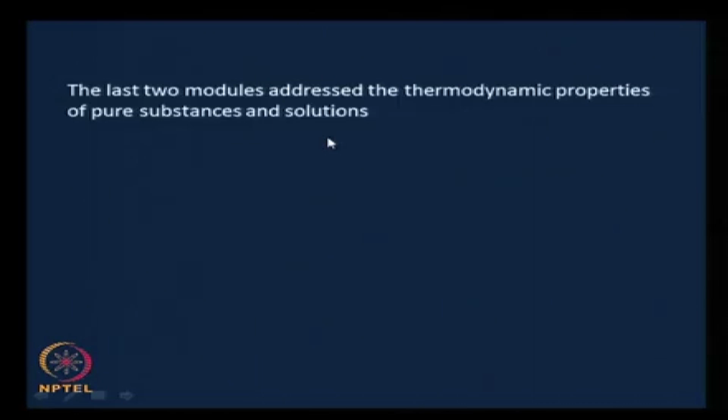The last two modules addressed the thermodynamic properties of pure substances, that was module number 3, and then module number 4 looked at solutions or mixtures, which arise when you put a minimum of 2 pure substances together. Now we have the background to address them, and it is natural to look at the next aspect, which is the equilibrium condition, and the thermodynamics associated with it.

A little while later I will tell you what equilibrium actually is, what is the nature of the equilibrium, and so on.

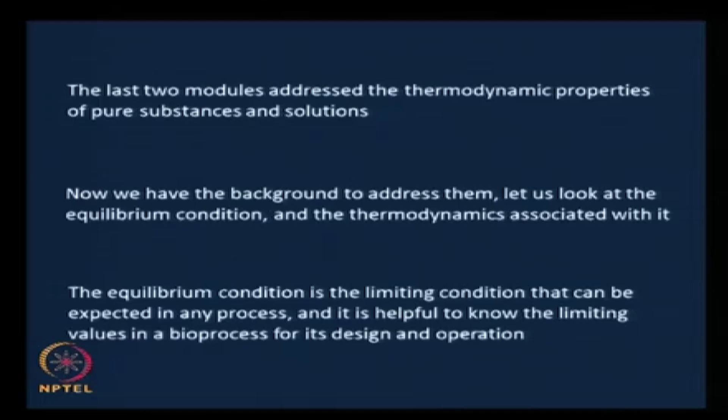Very briefly now, let me tell you that the equilibrium condition is the limiting condition that can be expected in any process. Any process is expected to ultimately reach equilibrium, and it is helpful to know the limiting values for a bioprocess's design and operation. If you just leave a process alone, it might attain equilibrium in a few milliseconds, microseconds, or maybe over years, but it is good to know the limiting value so that we can design keeping that in mind, knowing that that is the maximum we can achieve, and whatever we actually achieve would be some fraction of what is maximally achievable.

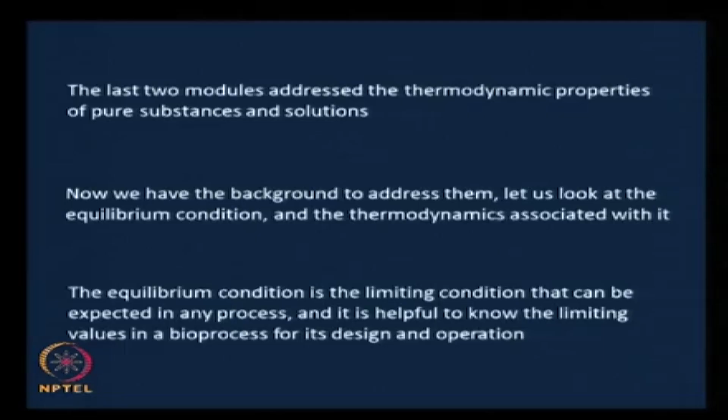This module will deal with equilibria when no reactions take place, and the next module, module number 6, will address equilibria associated with reacting systems. Therefore, in this particular module we will not consider any reactions at all.

Let us go back a little to recall whatever we did in module 1, because it becomes necessary here in the context of phase equilibria. We saw in module 1 that the information on phases at equilibrium can be obtained from either the pressure versus temperature diagram or the pressure versus specific volume diagram. If you recall those figures, we will take a look at them again here.

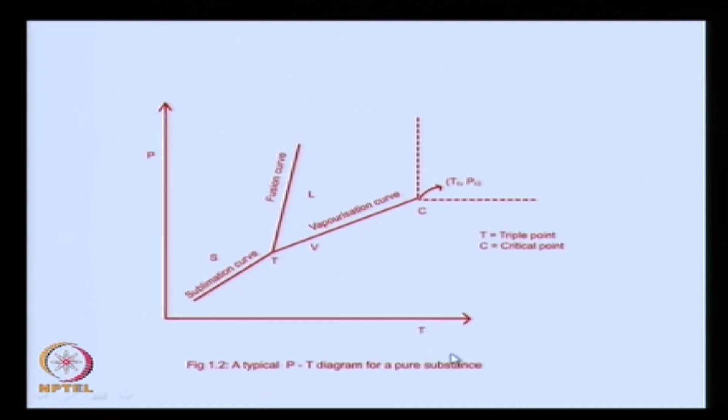Along the fusion curve we can expect the transition, which means that if a substance is going from solid to liquid, that can happen only along these combinations of temperature and pressure, x axis, y axis. So T comma P, each point here, that can happen only along the fusion curve.

Similarly, this is the vaporization curve, which is a transition or limiting line between the liquid and vapor phases, and therefore if a liquid becomes a vapor, it has to happen under these combinations of temperature and pressure.

And we have also seen, for completeness sake, that this is the critical point, beyond which the critical phase exists, which means above the critical pressure and above the critical temperature we have the critical phase, which is very interesting in itself, but we will not address that in this course. Therefore, in this course we will essentially look at solid, liquid and vapor phases and the demarcating regions.

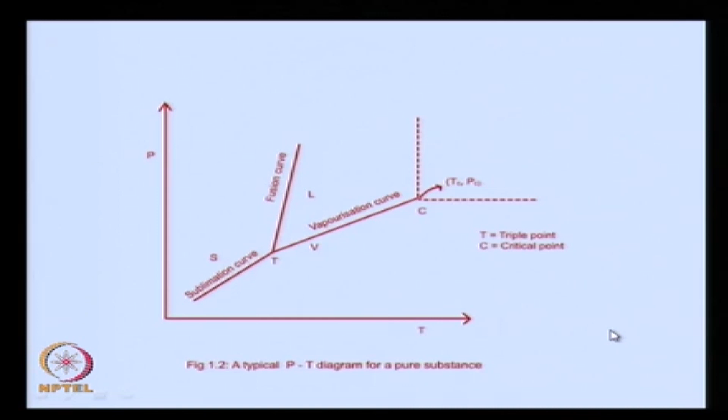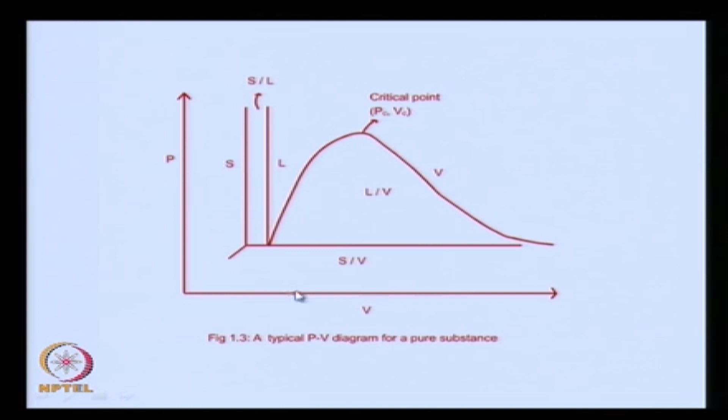We had already mentioned this, a PT or PV diagram provides information on the phases that exist at particular conditions of temperature and pressure, typically for a pure substance.

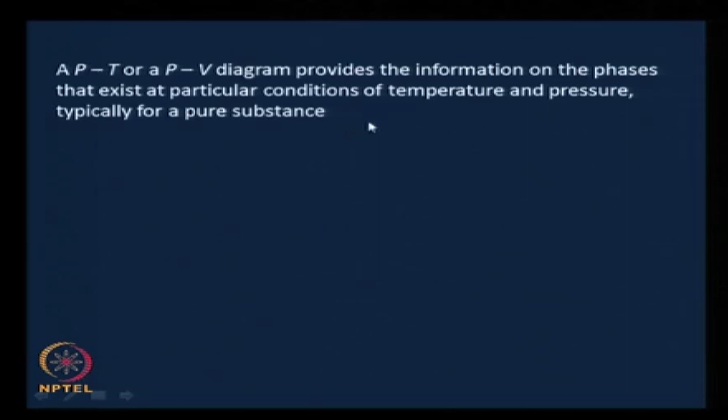For example, at atmospheric pressure, only at certain conditions of pressure, temperature and specific volume do these transitions exist. At 1 atmosphere pressure, H2O is a gas above 100 degrees C, a liquid between 0 and 100 degrees C, and a solid below 0 degrees C.

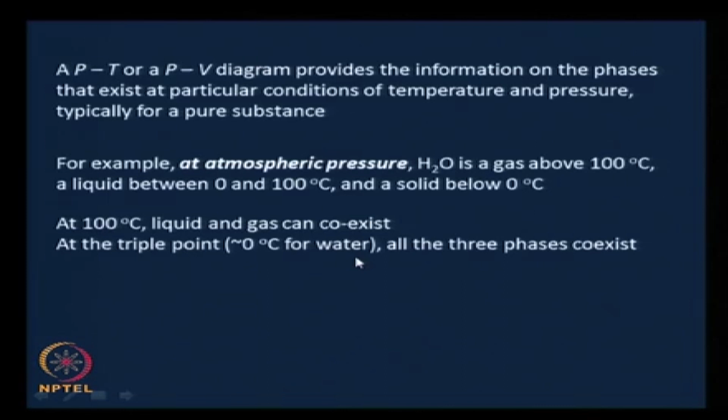At 100 degrees C, liquid and gas of H2O can coexist. We are talking about atmospheric pressure here, and at the triple point, which is about 0 degrees C for water, all three phases - solid, liquid and vapor - coexist.

Now we need to distinguish this pure substance from what we normally come across, which is a mixture of pure substances. I have given this example before, and just to drive home the point clearly, let me give it again. When we have a mixture of pure substances, say water and air, this is something that we find around us all the time. There is air and there is some water vapor in it.

And if we note this, the air itself consists of different species - nitrogen, oxygen, carbon dioxide and so on. Therefore, this mixture of water vapor and air contains all these plus water vapor. When we have such things, the behavior is going to be different.

Therefore, we should not make the error of extending the phase diagram for a pure substance to that for mixtures, and it happens without us realizing it. That is the reason why I am making the point here, especially in the case of water and air. Okay, please note this.

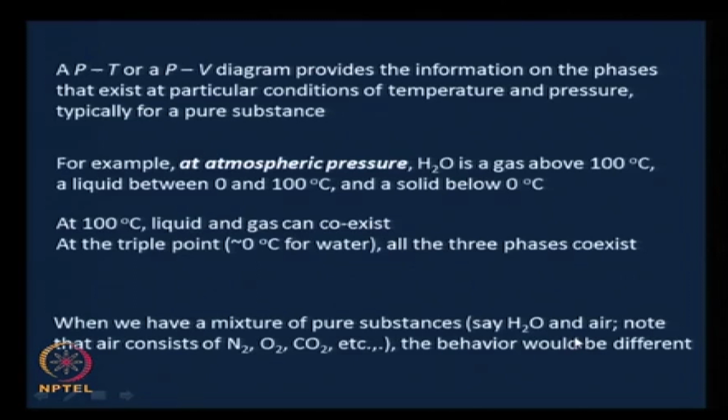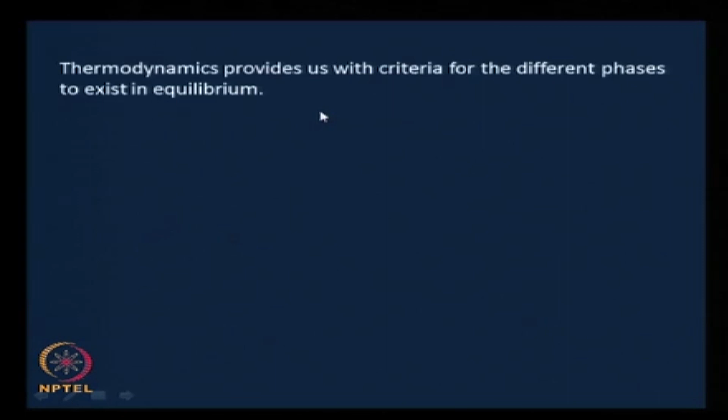Thermodynamics provides us with a criteria for different phases to exist in equilibrium. It tells us a priori when they will be in equilibrium, and that is the power of thermodynamics.

It is a dynamic equilibrium when changes at the micro scale balance each other so that there is no change at the macro scale. At equilibrium conditions, processes do take place, but the rate of the process in one direction equals the rate of the process in the other direction at the micro scale, and therefore both rates cancel each other, and at the macro scale we do not find any major difference. What I mean by this is...

Consider the evaporation of water. When liquid water becomes vapor, there is movement of water molecules from the liquid to the vapor, and under a given set of conditions that takes place at a particular rate. Here there is no air, by the way, just water and vapor, a pure substance. So the liquid water becomes vapor.

At the same time, there is water vapor there, and some of those molecules may not have enough energy, so they will get back to the liquid phase. So there is a rate at which liquid water becomes gaseous water, and there is a rate at which gaseous water becomes liquid water. What happens at equilibrium is that these two rates match. That is all that happens.

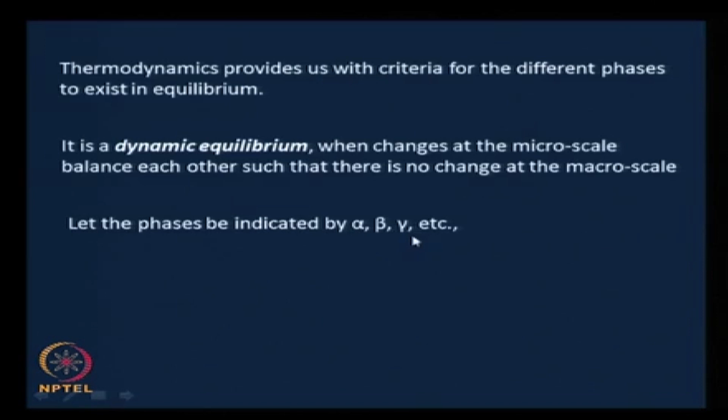For the purposes of this course, let the phases be indicated by alpha, beta, gamma and so on. We might need more, and in a minute we will see why. They could be multiple phases of the same kind, that is why we need more.

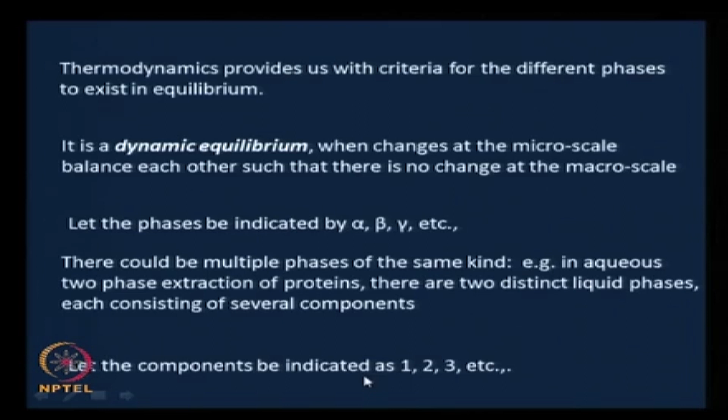For example, we may know that proteins are purified or extracted through a process called aqueous two phase extraction, where we have two liquid phases, two aqueous liquid phases. So you can call one alpha, the other beta and so on and so forth, and each of those phases consists of several components, and let the components be indicated as 1, 2, 3 and so on.

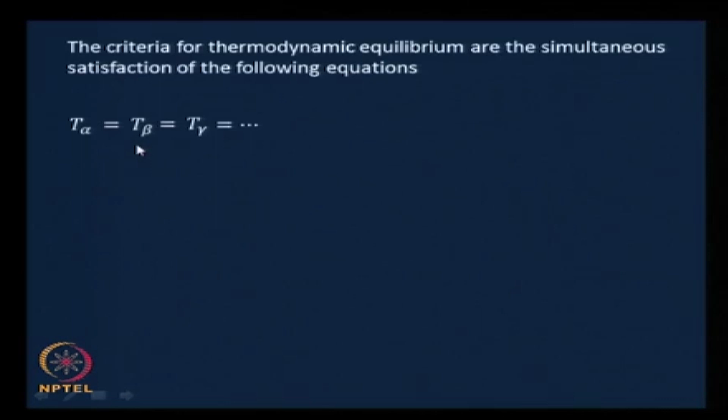Now comes the criteria that thermodynamics gives us for thermodynamic equilibrium, and for thermodynamic equilibrium the following equations must be simultaneously satisfied. The temperature of the alpha phase must equal the temperature of the beta phase, must equal the temperature of the gamma phase and so on, which means that the temperature of all the phases has to be equal. That is the first condition for thermodynamic equilibrium, and we will call that equation 5.1.

Secondly, the pressure of the alpha phase must equal the pressure of the beta phase, must equal the pressure of the gamma phase and so on. In other words, the pressure of all the phases in equilibrium must be the same, or only if the pressures are the same can we call the phases to be in thermodynamic equilibrium. We will call that equation 5.2.

Also, remember the chemical potential that we talked about. The chemical potential of component 1 in the alpha phase, mu 1 comma alpha, must equal the chemical potential of the same component in the beta phase, that must equal the chemical potential of the same component 1 in the gamma phase and so on. In other words, the chemical potential of a certain component must be the same in all the phases present at equilibrium. We will call this equation 5.3.

The other things are quite easy to see. The chemical potential of the second component must be the same in all the phases. Mu 2 alpha must equal mu 2 beta, must equal mu 2 gamma and so on. We will call this equation 5.4.

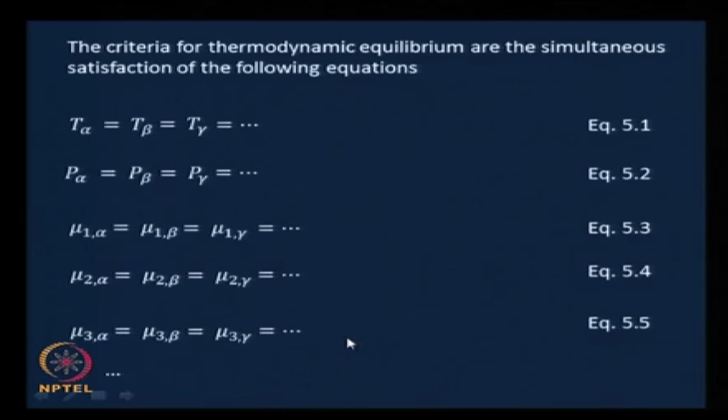We will have the number of these equations being equal to the number of components present in the system, which consists of phases in equilibrium. To repeat, the temperatures have to be the same across phases, the pressures need to be the same across phases, as well as the chemical potential of each component must be the same across phases. These are the conditions for equilibrium, and we can use them both ways: to check whether equilibrium is achieved, or to predict when equilibrium will be achieved.

Now, let us look at something that will be useful. You may have done this in earlier classes, but it is good to know clearly what this really is and the basis for this. That is why we are doing it here. It is nothing but the phase rule for non-reacting systems. In this module we are considering only non-reacting systems, therefore we will consider the phase rule for non-reacting systems here.

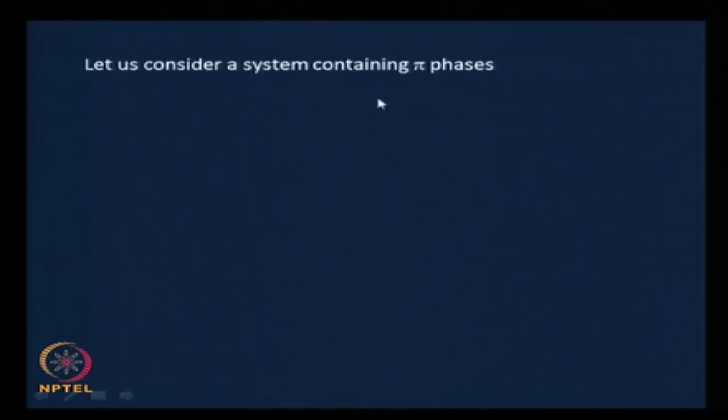Let us consider a system containing pi number of phases: gas, liquid, vapor, solid, and so on. We also saw it is not just limited to these phases. There could be two or many distinct liquid phases, there could be many distinct solid phases. It is a little difficult to imagine different vapor phases, but certainly there could be different liquid phases and different solid phases. So let us say in general that the system contains pi phases, and let the components in each phase be C, and we implicitly assume each component is present in each of the phases.

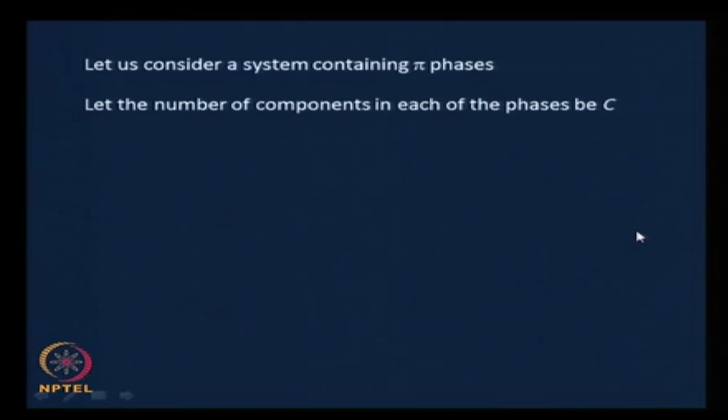If the number of components in each phase is C, we know that the mole fractions or mass fractions need to add up to 1. For example, if the mole fraction is x1, x1 plus x2 plus x3 and so on till xn must equal 1. This automatically gives us a relationship to be satisfied between the concentrations of the C components in each phase.

Therefore, the composition of the phase is specified by C minus 1 variables. Suppose there are 5 components, we need to know the concentrations of 4 components, and the last component we can always get by adding the mole fractions of these 5 and equating it to 1. Therefore, if we have 4, we can always find the 5th one. So the composition of a phase is specified by C minus 1 variables.

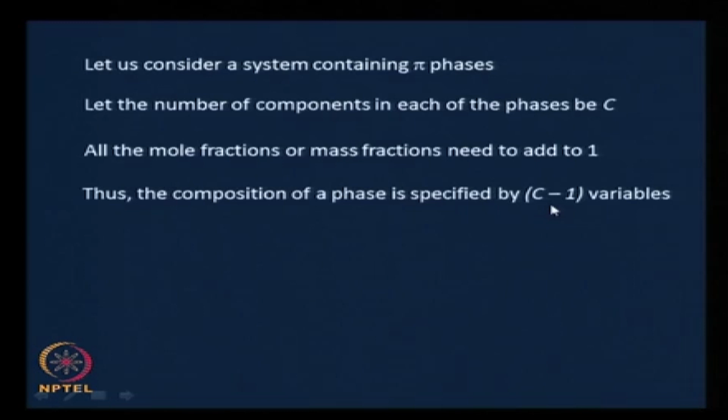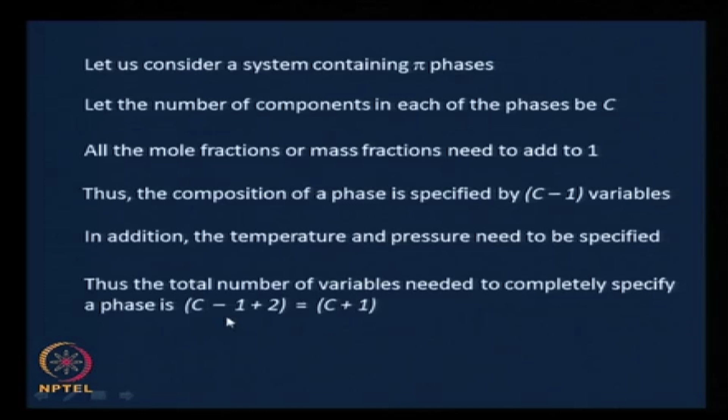In addition, the temperature and pressure need to be specified, because they are conditions of equilibrium. Equality of temperature and equality of pressure across phases are conditions that need to be satisfied for equilibrium, and therefore, the total number of variables needed to completely specify a phase is C minus 1 plus 2, which equals C plus 1. That is C minus 1 variables of composition plus 2 variables, temperature and pressure. You add these together and you get C plus 1.

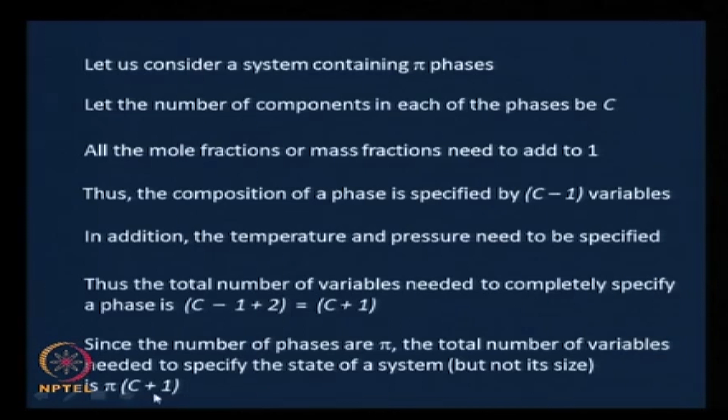And we said that each component is present in all the phases, and the total number of phases is pi. Therefore, the total number of variables needed to specify the state of the system, but not its size, is pi phases times C plus 1 variables required to specify each phase. Therefore, pi into C plus 1.

If the various phases of the system are at equilibrium with each other, then the conditions of equilibrium can be applied. That is, equations 5.1 to 5.5: T alpha equals T beta and so on, P alpha equals P beta equals P gamma and so on, and the chemical potential of each component in each phase must be the same.

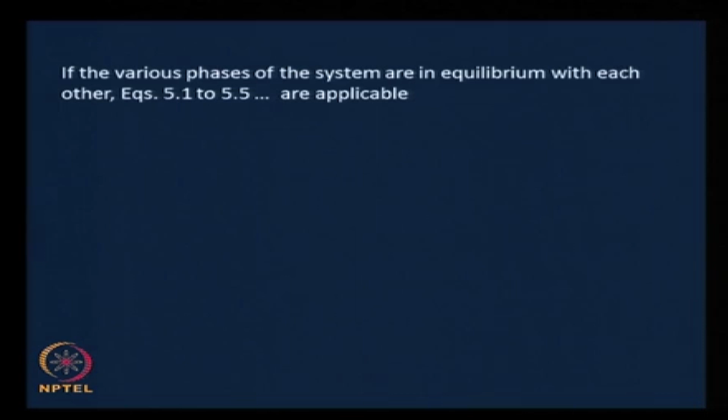There are C equations for chemical potential, one for each of the C components present. If we write mu1 alpha equals mu1 beta equals mu1 gamma, then mu2 alpha equals mu2 beta equals mu2 gamma and so on, mu3 alpha equals mu3 beta and so on, you have C such equations if you have C components.

Therefore, we have C equations for chemical potential, one for each of the C components, and one each for the temperature and pressure: T alpha equals T beta equals T gamma, P alpha equals P beta equals P gamma. Therefore, we have a total of C plus 2 equations.

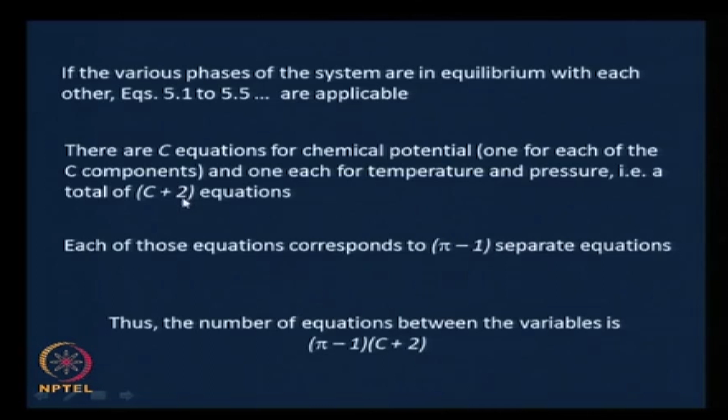Each of those equations corresponds to pi minus 1 separate equations, because T alpha equals T beta is one equation, T alpha equals T gamma is another equation, and so on and so forth. Therefore, the number of equations between the variables is pi minus 1 separate equations into C plus 2 equations.

Why did we do all this? It is because of this: we know that for a meaningful solution set, when you are trying to solve for some set of unknown variables given others, the number of variables must be greater than or equal to the number of independent equations, otherwise we do not get a unique solution. Thus, pi into C plus 1, the number of variables we saw earlier, must be greater than pi minus 1 into C plus 2 equations for a general case.

We have completely generalized this. We said pi phases and C components, and we got the number of variables as pi into C plus 1, and the number of independent equations between them as pi minus 1 into C plus 2. We are using the mathematical criterion that the number of variables must be greater than or equal to the number of independent equations if we need to solve them uniquely. Therefore, pi into C plus 1 must be greater than or equal to pi minus 1 into C plus 2.

In other words, if you transpose this, C minus pi plus 2 must be greater than or equal to 0. You can do the transposition and indeed find that C minus pi plus 2 equals 0 or is greater than or equal to 0. We will call this equation 5.6.

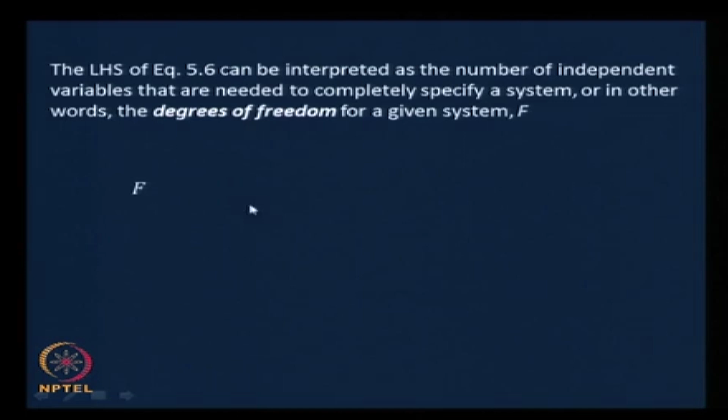The left hand side of 5.6, which is C minus pi plus 2, can be interpreted as the number of independent variables needed to completely specify the system, or in other words, the number of degrees of freedom for a given system. Let us indicate the number of degrees of freedom by f, and therefore f is nothing but C, the number of components, minus pi, the number of phases, plus 2. This is the number of variables needed to completely specify the system.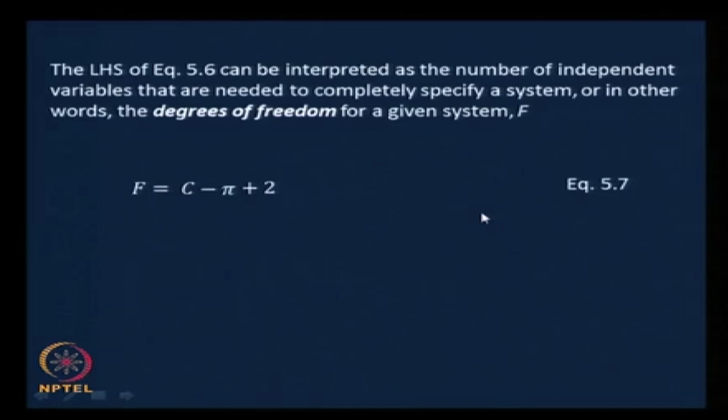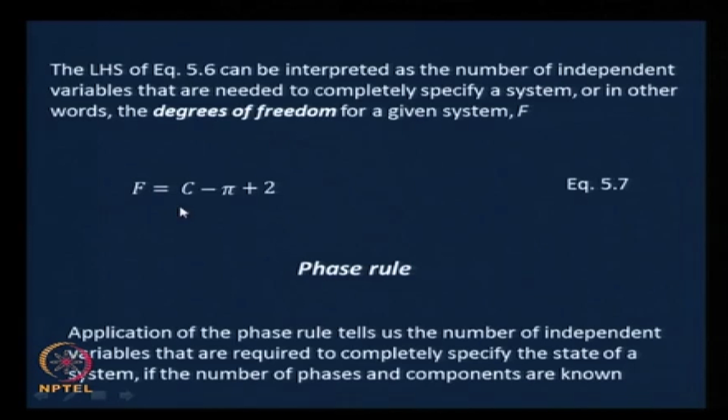Let us call this equation 5.7, and some of you would have already realized that this is indeed called the phase rule. Application of the phase rule tells us the number of independent variables required to completely specify the state of a system if the number of phases and components are known. And of course, we have assumed the equilibrium conditions. We have written the phase rule for pi phases in equilibrium with each other.

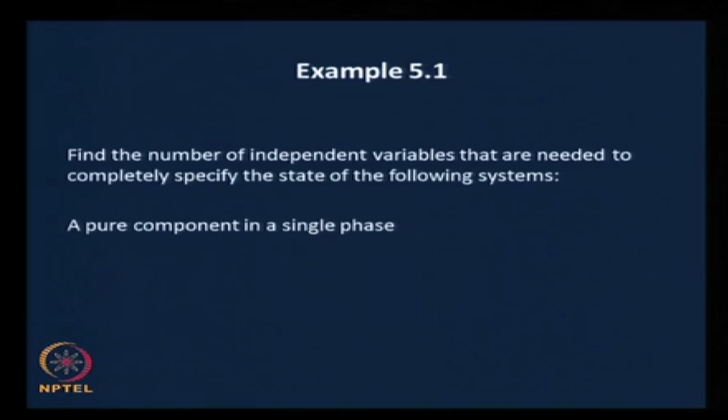To get more comfortable, let us do this example. Find the number of independent variables needed to completely specify the state of the following systems: a pure component in a single phase, that is the first system; a pure component present as a mixture of liquid and vapor. Please take about 10 minutes. We have done a few things till now in this class, so please take a few minutes, go back and see what we have done, and see what you need to solve this example. Take about 10 minutes for that. I will come back and tell you the solution. Go ahead, please.

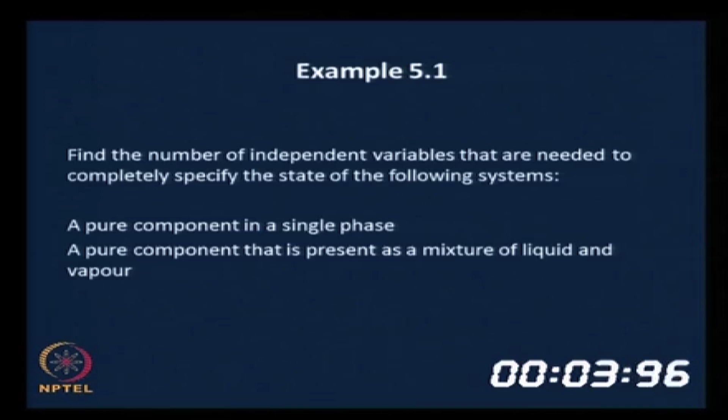This was a straightforward application of the phase rule, therefore most of you would have gotten the solution already. The solution is as follows.

We said the first system is a pure component, which means C is 1, single phase, which means pi is 1, and therefore C minus pi plus 2, in this cancels, we get F equals 2, and therefore both temperature and pressure need to be explicitly known.

F essentially implies the number of independent variables that are needed to fix the state of a particular system, and typically temperature and pressure can be taken to be those variables of choice. The temperature and pressure need to be explicitly known to completely specify the state of the system.

The second example was if the system is a pure component with C equals 1 in 2 phases, pi equals 2, then F equals C minus pi plus 2, and that turns out to be 1. In this case we just need one variable, say temperature or pressure, and that is the only thing needed to completely specify the state of the system.

What this also means, or another way of looking at this, is that the temperature can be freely chosen, but the pressure cannot be freely chosen. It has a definite value for a particular other variable. For example, if the temperature can be freely chosen, the pressure will have a definite value for the chosen temperature. If the pressure can be freely chosen, then the temperature will have a definite value for that chosen pressure.

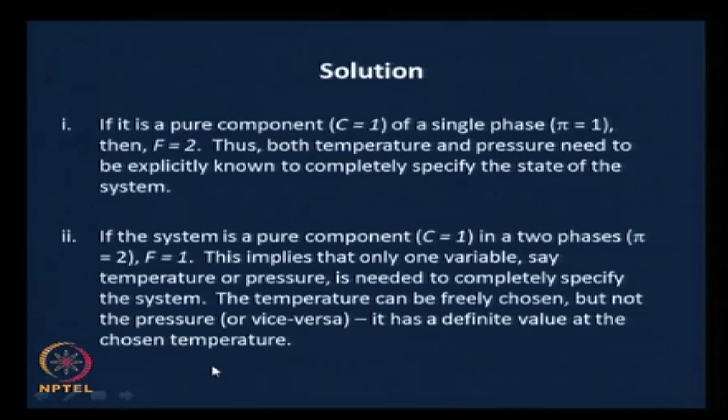Okay, let us begin to look at one of the fundamental relationships when we consider phases in equilibrium, especially when transitions between phases take place, and that is called the Clausius-Clapeyron equation. We are going to start doing this, and let us see how far we get today.

Let us consider our system as a pure substance. We will start with pure substances, that is good to understand the basis. Let us consider our system as a pure substance in 2 phases, say alpha and beta at equilibrium.

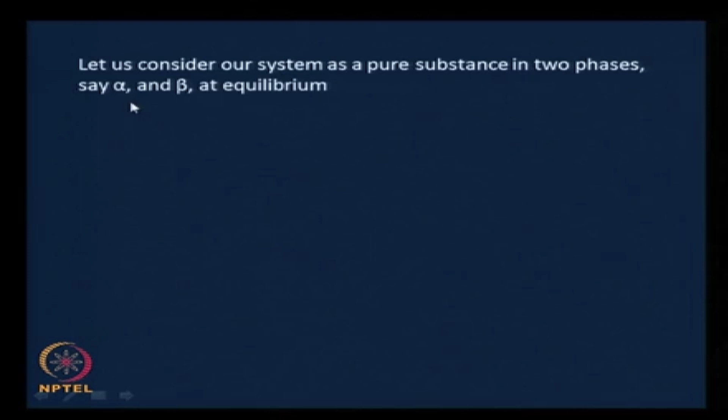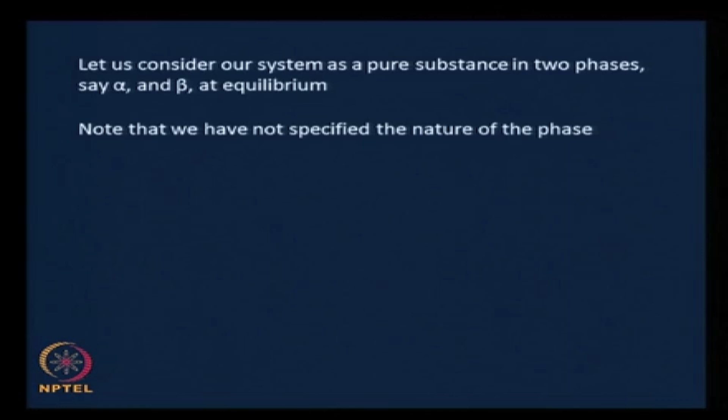What I would like you to note is that we have not specified the nature of the phase. These alpha and beta could be any 2 phases, they could be liquid and vapor phase, liquid and solid phase, vapor and solid phase. That is what is given here. The following discussion, unless indicated otherwise, is applicable for any 2 phases. They could be vapor liquid, solid vapor.

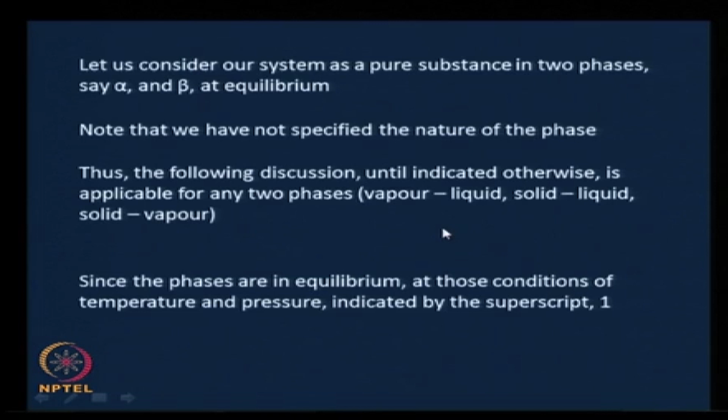This is the chemical potential of the pure component in the alpha phase at certain conditions of temperature and pressure, must equal the chemical potential of the same component in the beta phase at the same conditions of temperature and pressure. This automatically comes from the condition of equilibrium. Let us call this equation 5.8.

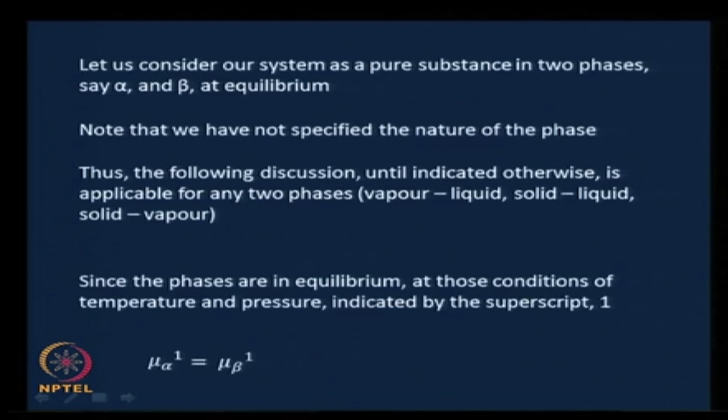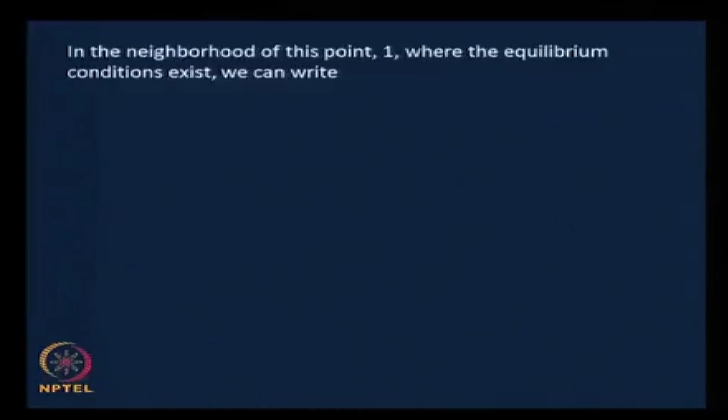In the neighborhood of this point, which means a very small region around this point, mathematically speaking, where the equilibrium conditions can be considered to exist. It is a hypothetical situation here, but we need the concept of neighborhood to completely develop this particular concept.

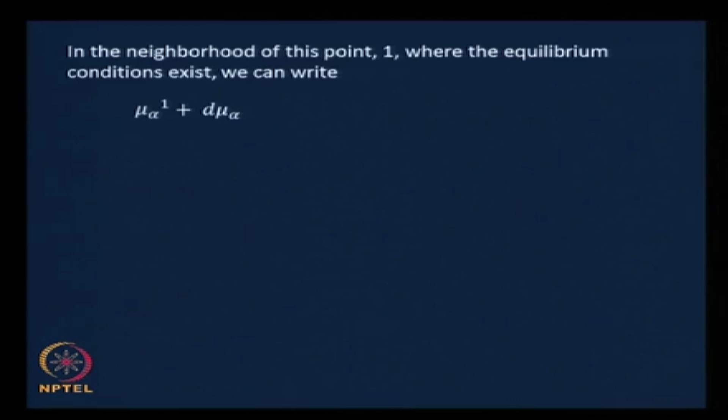Therefore, in the neighborhood of this point where the equilibrium conditions can still be considered to exist, we can write mu alpha 1 plus d mu alpha, that is a change from point 1 in the neighborhood of point 1, equals mu beta 1 plus d mu beta.

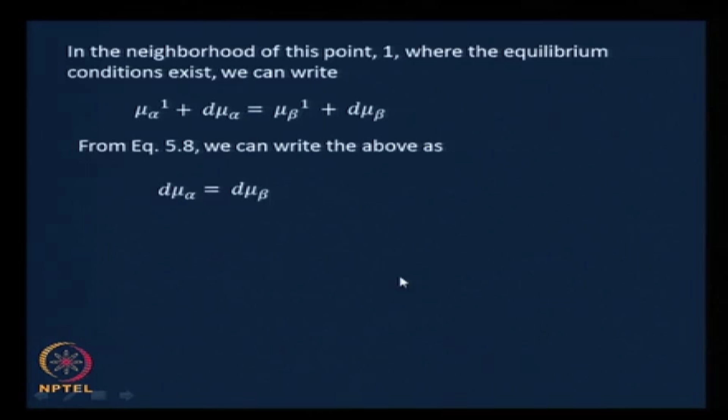Of course, from 5.8, the previous equation, we know that mu alpha 1 equals mu beta 1, therefore they can be cancelled, and therefore d mu alpha equals d mu beta, the differential of mu alpha equals the differential of mu beta. Let us call that equation 5.9.

Since the chemical potential of a pure substance is a function of only temperature and pressure, we can write equation 5.9 in terms of the expanded functionalities. This is the total differential, writing it in terms of partial differentials from the theorem in mathematics.

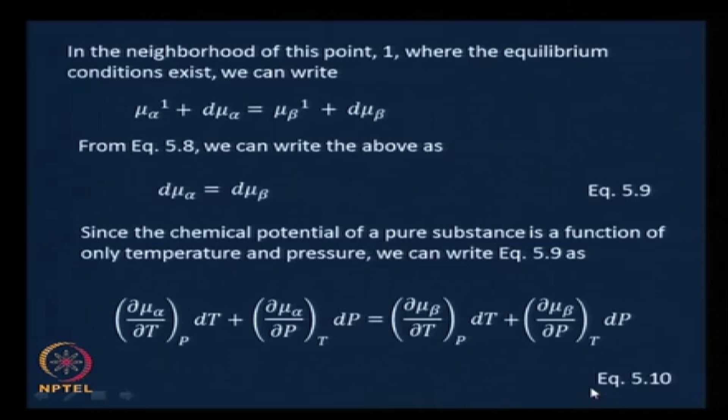D mu alpha is dou t of mu alpha at constant pressure dt plus dou p of mu alpha at constant temperature dp. This is d mu alpha. This equals dou t of mu beta at constant pressure dt plus dou p of mu beta at constant temperature dp. Let us call this equation 5.10.

Now, let us take a slight detour to establish a few things, and then we will come back to our two phases and so on.

From equation 2.15 that we saw earlier in module number 2, dG equals minus S dT plus V dP. You recall this equation now, by now you must be familiar with this, since we have seen this so many times and used it also. Plus, of course, this is a multi-component system, therefore, sum over all i, mu i dni. This is equation 2.15 that we saw earlier.

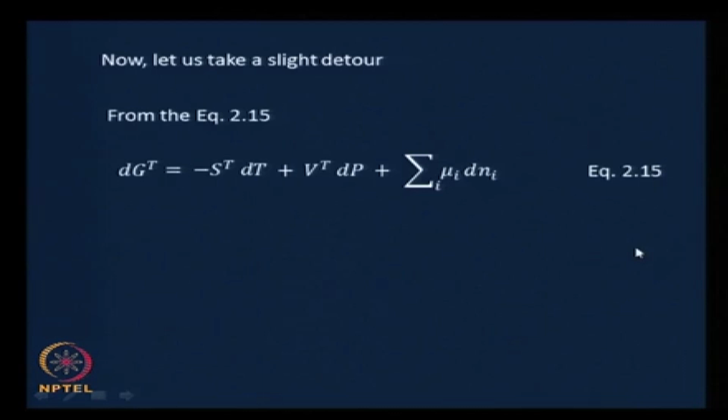Recall the reciprocity relationships that we again saw in the second module.

Following the reciprocity relation, doing the reciprocity relationship for equation 2.15, the following relationships can be written out. Dou mu I dou p at constant t and ni equals dou vt dou ni. Now, we are doing the reciprocity between these two.

Dou mu I dou p at constant t ni equals dou vt dou ni at constant t p and all other n j's which are different from ni. We can write this, and that equals, this is nothing but the definition of the partial molar volume Vi bar.

Let us call this equation 5.11, and if we do the reciprocity between this and this, we can write dou mu I dou t at constant p ni equals minus dou st dou ni at constant t p and all other n's which are different from this I, or all other nj's where j is not equal to I.

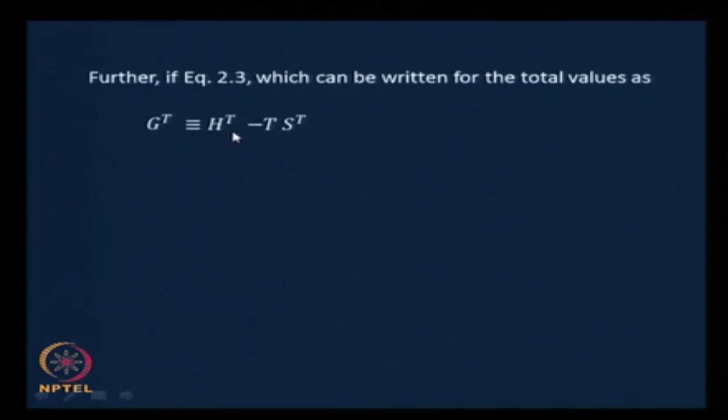If this is differentiated with respect to Ni at constant T and P and all other Nj's, we can write in terms of partial molar properties as Git hash equals Hit hash minus Tsit hash. Now, we are differentiating each term with respect to Ni at constant Tp and Nj, and by definition that derivative would be Git hash.

By definition, that this derivative would be HIT hash, and this one would be minus T SIT hash. We will call this equation 513.

And from equation 216 we get GIT hash equals mu I, the partial molar property with respect to the single mole there, therefore, we get it equal to mu I, and therefore, from equations 514 and 512, equation 513 from 514 and 512, 514 is this GIT hash equals mu I, and 512 was

This, which is the which we obtained from the reciprocity relationship. From these two equations we can write

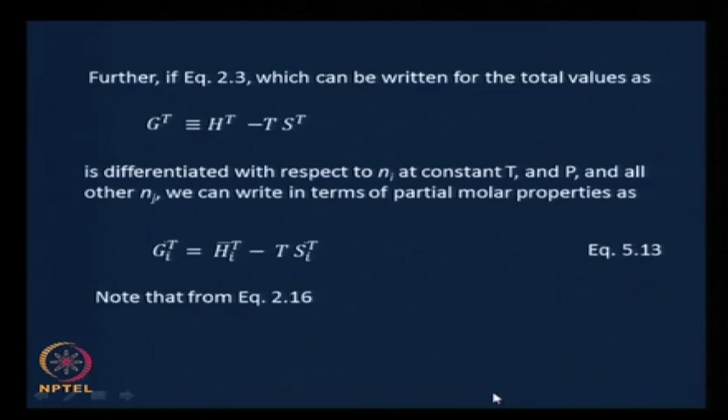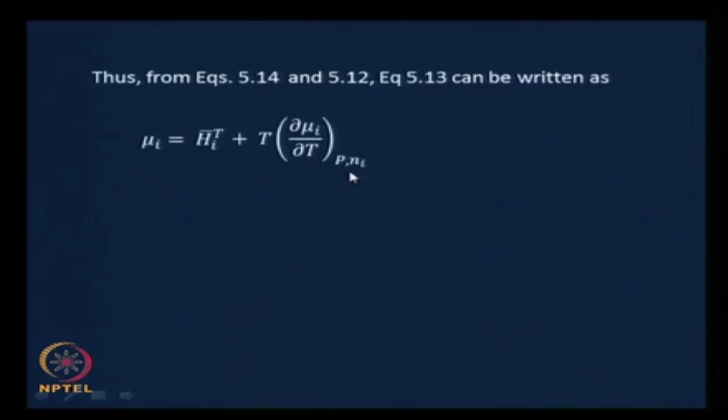Mu I equals HIT hash plus T dou mu I dou T at constant P n I, which can be rearranged as,

I am just rearranging this by T dou mu I dou T at constant P n I minus mu I, and I am dividing this by T squared, is nothing but minus HI, now I have taken this to the other side, minus HI T hash by T squared, just a rearrangement.

There is a reason for this rearrangement, or the reason for this rearrangement is this form is nothing but dou T of mu I by T P n I.

If you are unable to see this, consider this as U by V, or numerator by denominator, denominator function into derivative of the numerator function minus the numerator function into derivative of the denominator function, which is 1 here, divided by the square of the denominator function, and that is the derivative dou mu I by T dou T at constant P n I equals minus HIT hash by T squared.

We will call this equation 515.

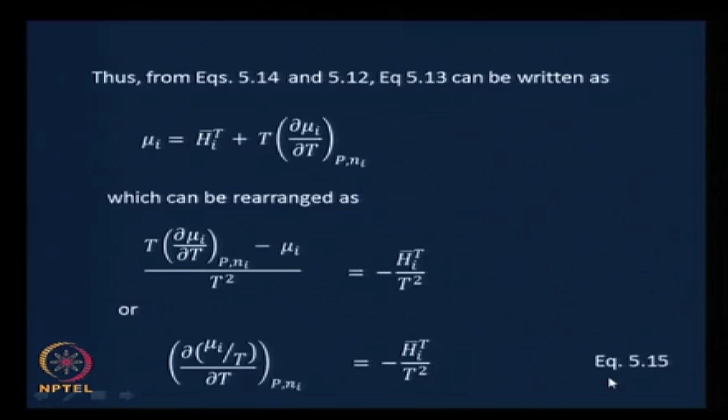For a pure substance, the partial molar properties are nothing but the properties per mole of the pure substance, they kind of coalesce into each other, and thus the equivalent equations of 511, 512 and 515, when we write down the equations you can recall those, or you can go back and check what 511, 512 and 515 are.

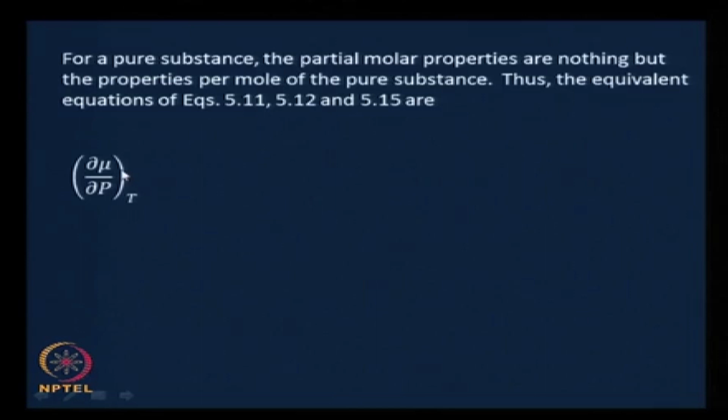Dou mu by dou P at constant T equals V, equation 516, dou mu dou T at constant P equals minus S, equation 517, and dou mu by T dou T at constant P equals minus H by T squared, equation 518.

Our 511 was when you had a I here and a Vi bar here, 512 was you had a I here and SIT hash here, and you had to take other n's also as constant, and here you had a I and HIT hash here and P and other n's to be constant here.

Therefore, since these are written for a single mole of the pure substance, we can drop all these I's and hashes and so on, because the partial molar property becomes the property per mole of the pure substance.

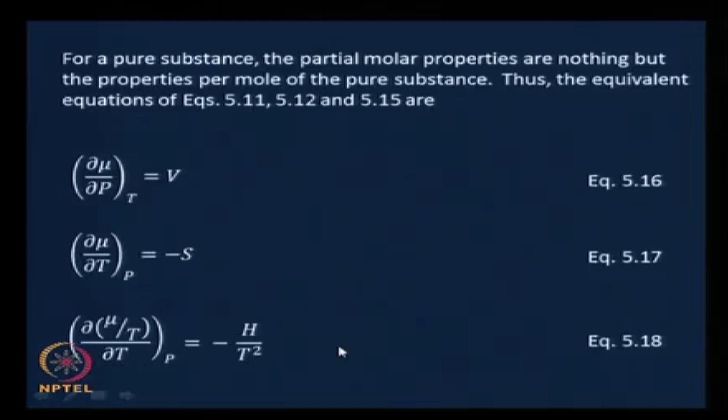What we will do when we begin the next class is we will get back from this detour. We essentially wanted to come up with these relationships, and that is why we took a detour. When we begin the next class, we will get back to considering the two phases in equilibrium and the process of transfer from one phase or transition from one phase to another, which is the context of the Clausius-Clapeyron equation.